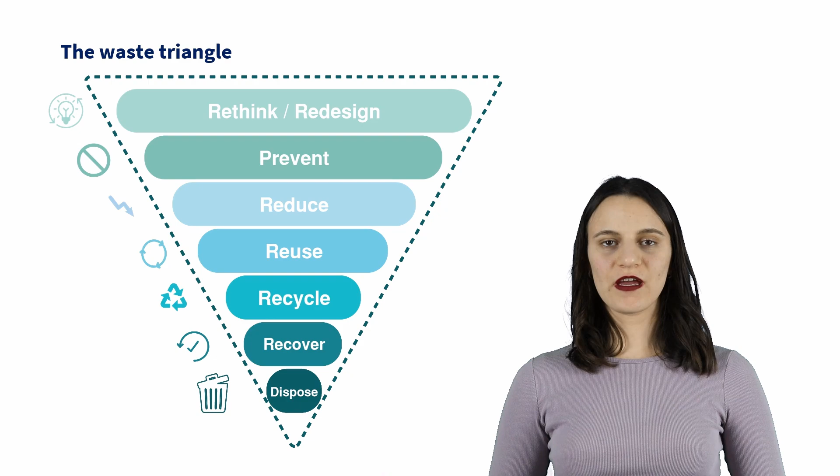To rethink how we approach the use of glass, we can focus on two key strategies: rethinking the supply chain of glass and redesigning glass products. Rethinking the supply chain aims to achieve several important goals, including: raise the circularity of float glass, and this means increasing the amount of float glass which is recycled; avoid low-value recovery. We should aim to recover glass in applications which retain its value, rather than allowing it to be downcycled into less valuable products.

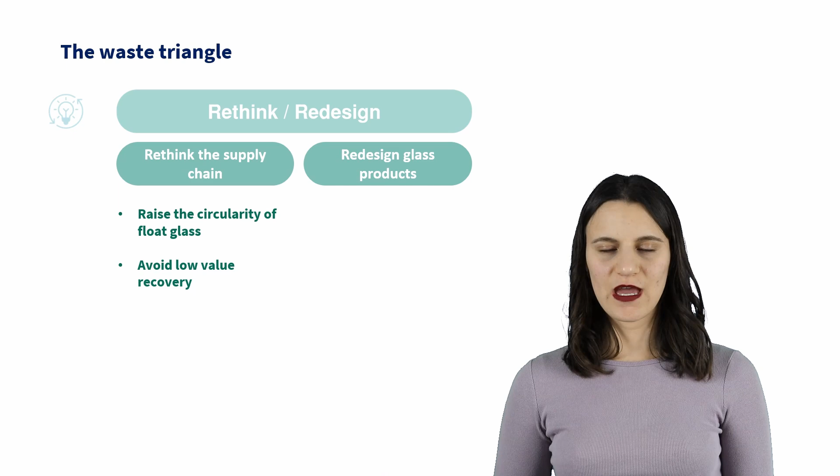Build a repatriation chain to collect the post-consumer glass waste, and this involves creating a system to efficiently collect and return the glass waste to the manufacturing process. Prefer selective deconstruction over building demolition. Selective deconstruction allows us to carefully dismantle buildings to recover materials like glass, rather than demolishing buildings and losing valuable resources. The second approach is redesigning glass products.

This can be done by applying several design strategies, such as design for disassembly, to facilitate the separation of materials, design for reuse to facilitate the reuse of the materials, design for recycling to facilitate the recycling, and design for repair to facilitate the repair of the component.

Let's dive into the first approach: rethink the supply chain of glass products. The aim is to shift from the traditional linear life cycle of glass, where it is manufactured, used, and then discarded, towards a more circular model. The current linear process includes manufacturing, use in the construction field, a period of service life, and ultimately ending as waste. However, achieving circularity isn't without challenges. In the current scenario of glass, landfill remains the primary end-of-life destination, with downcycling at best for a small portion of glass waste, as container glass and insulation panels such as fiberglass.

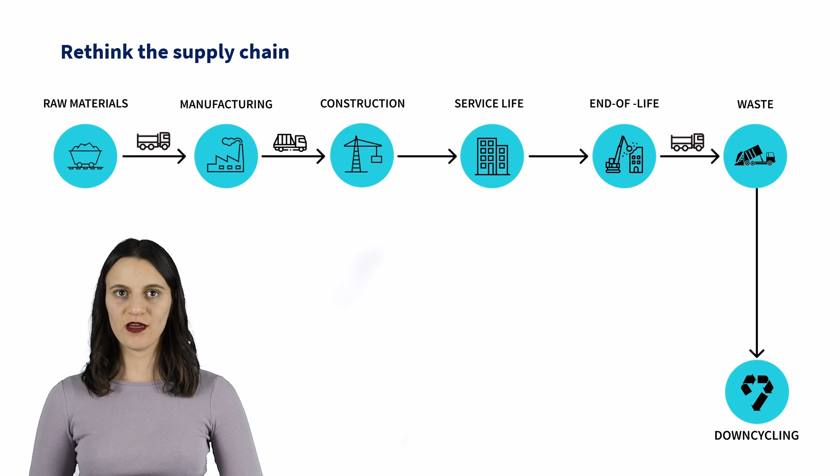To rethink the supply chain of glass and make it more circular, there's the need to rethink the processes and the stakeholders involved in them. After their first life cycle, glass products can be repaired to extend their lifespan. Additionally, some glass products can be reused directly or disassembled, and the glass remanufactured into new units. If they can't be reused, they can be treated and recycled by melting the cullet in the manufacturing process. By adopting these strategies, reuse, recycling, and remanufacturing, we create a sustainable supply chain for glass, reducing waste and conserving resources. Now let's dive into the second approach, which is the redesign of the glass products.

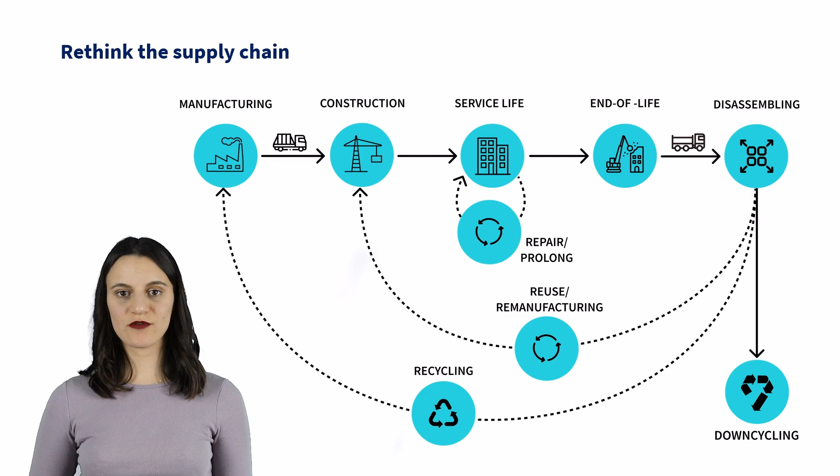And here we will focus on the design for disassembly of the insulating glass unit. Here's the scheme of an insulating glass unit. By designing insulating glass units for disassembly, we should ensure that they can be easily taken apart at the end of their life, allowing each component to be reused or recycled. At present, there are very few examples of facade design focused on the ease of disassembly at the end of life. However, it should be noted that assembling of insulating glass units is currently an optimized and economic process at an industrial scale production, and therefore is unlikely to change in the near future.

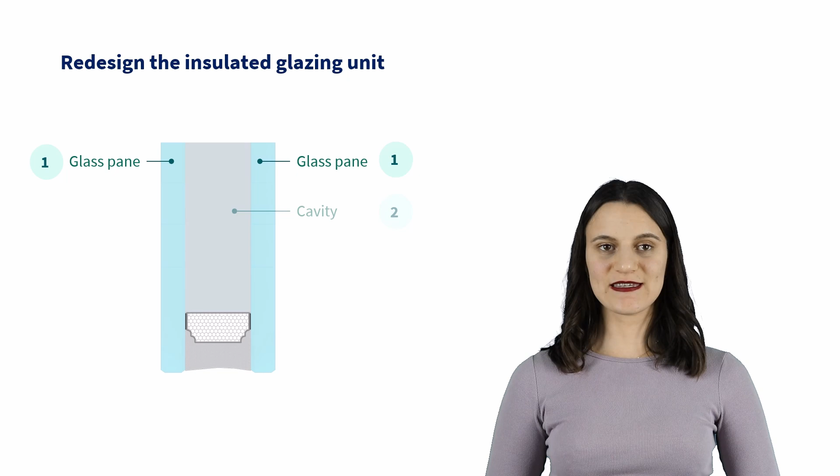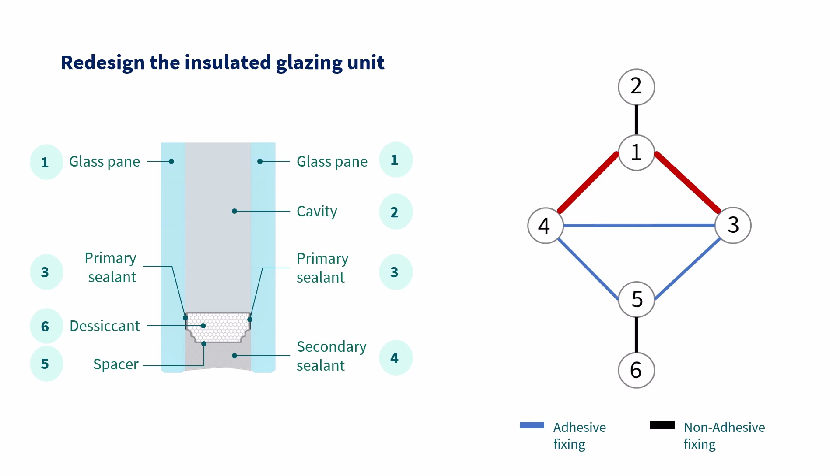These are the components of a double glazing unit with a typically metallic frame spacer. The connection diagram shows the various parts of the insulating glass unit and how they are interconnected, especially focusing on the connection type between two different materials. To apply the design for disassembly, we need to rethink these connections. For instance, using reversible adhesive or mechanical fasteners instead of permanent bonding can make disassembly much simpler. Adhesive connections represent the main constraint for glazing disassembling. Therefore, the links 3.1 and 4.1 need to be redesigned.

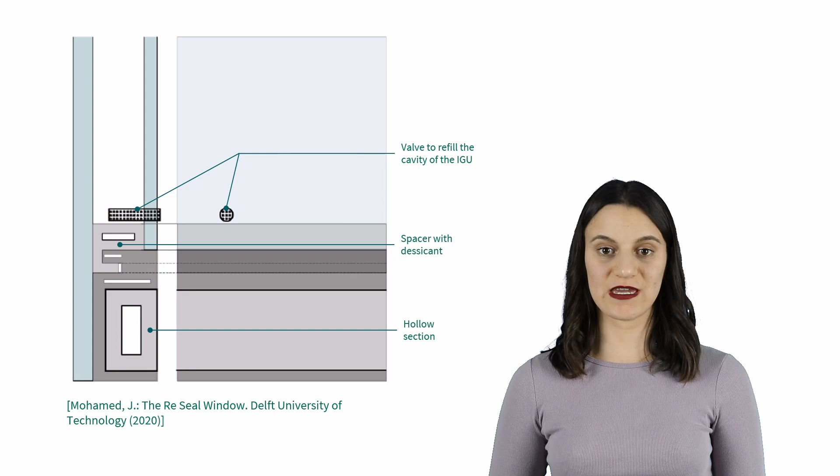Here there are a few examples of attempts to develop the design of an insulating glass unit which is dismountable, and they are mainly developed by students during their thesis project. Beyond these few examples, the research on the topic is not fully investigated at the moment.

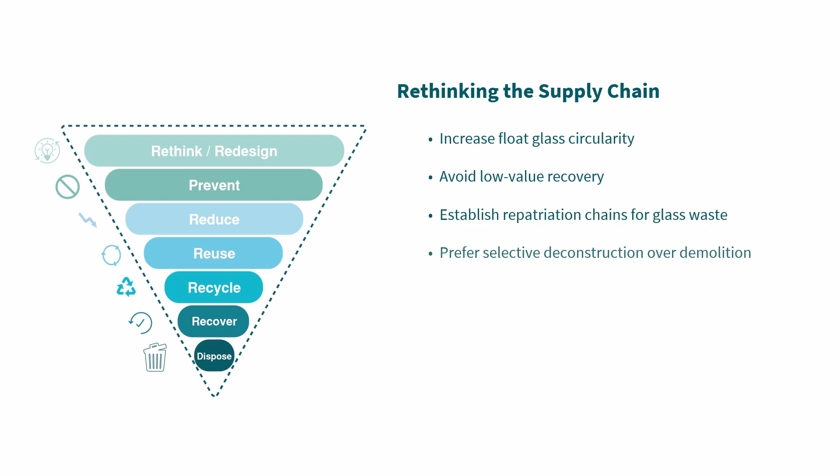In this lesson, we explored the Rethink strategy and how this could be applied to reduce the environmental impacts of glass. We focused on two key strategies: rethinking the supply chain of glass, and this involves increasing the circularity of float glass, avoiding low-value recovery, establishing a repatriation chain for the glass waste, and preferring selective deconstruction over building demolition; and redesigning the glass products. The design for disassembly approach ensures that the components of a product can be easily separated and repurposed at the end of their life. Although many challenges exist, such as the adhesive connection in the insulating glass units, innovative approaches can facilitate disassembling and recycling, so are worth investigating.